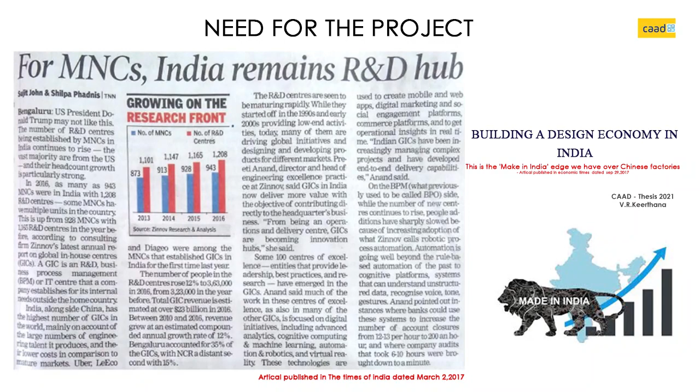Made in India can overtake Made in China in near future for one big reason: China has to pay more to its workers, which raises output cost and makes goods expensive.

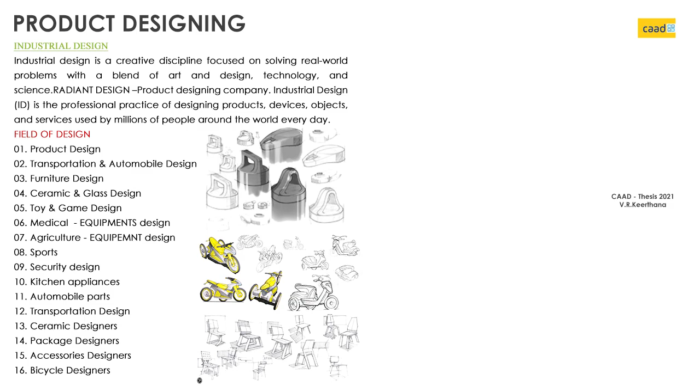Fields of innovation: designing always goes with science and technology. So product designing and science and technology are two main fields to be involved. Product design comes under many categories, from which industrial design, communication design, etc. are taken up. Science and technologies come under research and development.

The site is located in Coimbatore, Tamil Nadu, exactly on Avinashi Road, Peelamedu, Coimbatore, Tamil Nadu. Coimbatore is the third largest city of the state, one of the most industrialized cities in Tamil Nadu.

There are more than 25,000 small, medium, large-scale industries and textile mills situated here. Coimbatore is also famous for foundry and automobile industries, manufacturing of textile industry equipment, spares, motor pump sets, wet grinders, and varied engineering goods and services.

Education: Coimbatore is one of the very important educational cities in South India. Coimbatore is also home to many state-owned universities. It ranks top 10 in India and second in Tamil Nadu, next to Chennai, in science and technology.

Industries: the city is the second largest software producer in Tamil Nadu, next only to Chennai. The software development is set to take an upswing with the launch of TIDEL Park and other private IT parks around the city. Coimbatore is also emerging as an IT and BPO city, ranked 17th among the global outsourcing cities. The city houses a large number of small-scale engineering companies.

Site area: 49,574 square meters, that makes up 12.25 acres. Location: 63 Avinashi Road, Peelamedu, Coimbatore, Tamil Nadu.

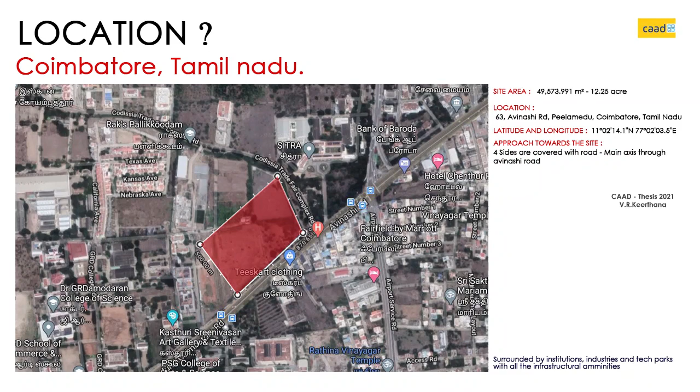Approach towards the site: 4 sides are covered with road, main axis through Avinashi Road, surrounded by institutions, industries, and the tech parks with all the infrastructural amenities.

Site analysis: the approach towards the site is from Avinashi Coimbatore Road and Codissia Trade Fair Road on 2 sides. It is surrounded by commercial zone, institutes, auditorium, etc. One side of the road goes towards Avinashi and the other side goes towards central Coimbatore.

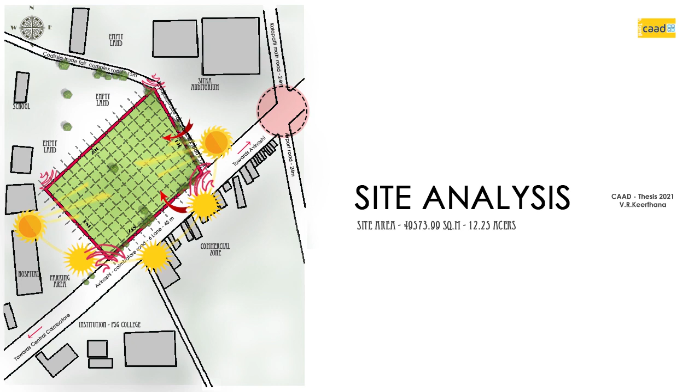The junction which connects Avinashi Coimbatore Road, Airport Road and Kalapatti Road acts as a main junction, with accessibility from 2 main roads. It falls under tropical wet and dry climate. Noise from main roads is high, and the other sides are consecutively low. The wind flows from the northeast.

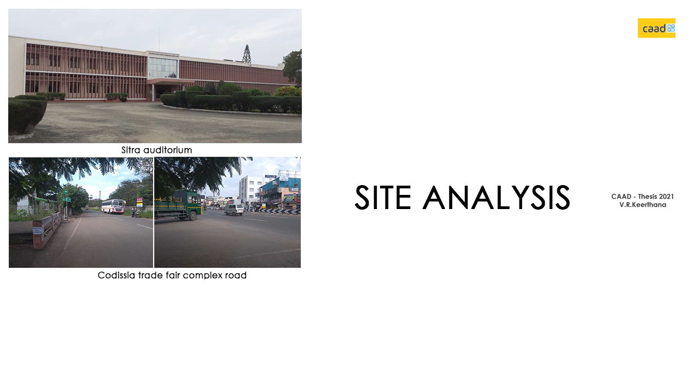Some of the on-site and off-site photos: Sitra Auditorium, Codissia Trade Fair Complex Road, junction which links all 4 main roads, PSG College, Aravind Eye Hospital, and the site filled with shrubs, creepers, plants and grass.

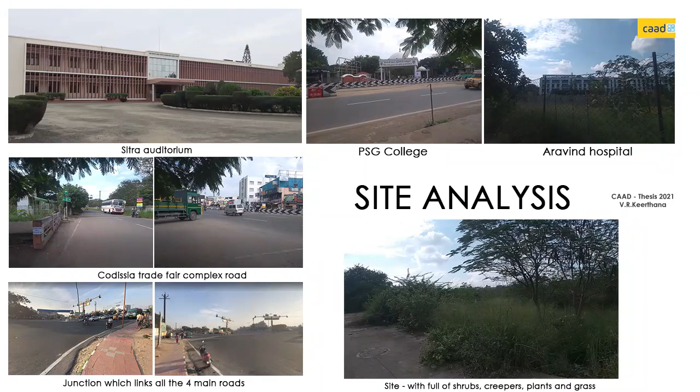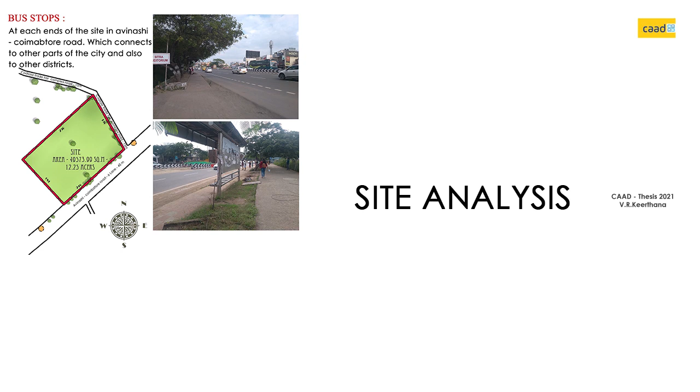Bus stops at each end of the site towards the main road, and railway at 3.27 kilometers with travel distance of 10 minutes to Peelamedu railway station, and airport at 1.8 kilometers with travel distance of 5 minutes to Coimbatore airport. Pedestrians have a fully maintained footpath with buffer spaces provided in the front.

Special study: play of daylighting in architecture. A room is not a room without natural light. Natural lighting plays a major role in workspaces, which improves satisfaction and productivity in users.

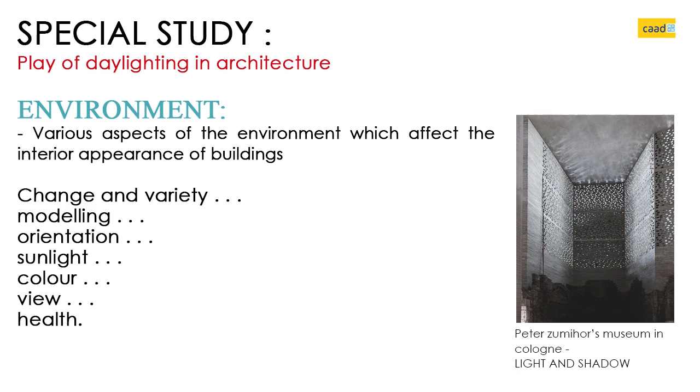Natural light reduces the need of artificial lighting during daytime hours. Energy costs are lowered, which has a positive impact on the environment. Maximize the benefits of natural light in office spaces by including biophilic elements; adding indoor plants and fountains make spaces feel calmer and improve satisfaction, which is influenced by windows, obstacles, etc.

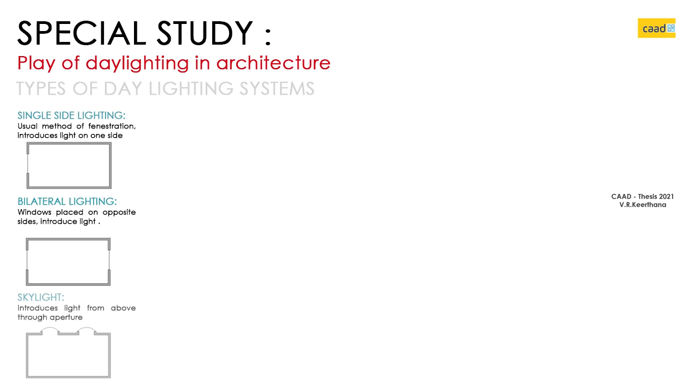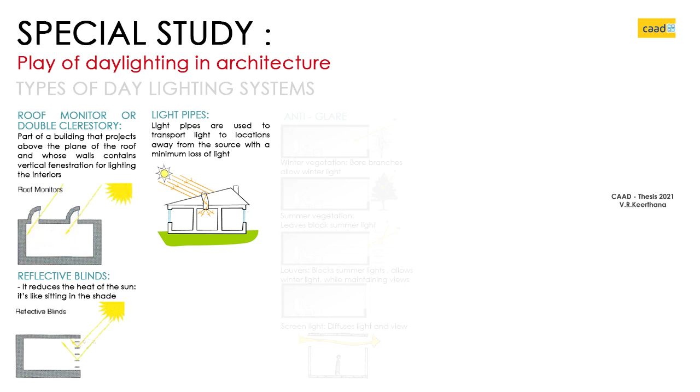Types of daylighting systems: single side lighting, bilateral lighting, sky lighting, light well, light shelf, external reflectors, atrium, light duct, clerestory, roof monitors or double clerestory, reflective blinds, light pipes, anti-glare components, side lighting, top lightings, trellis, and planters. Concept: nature between walls.

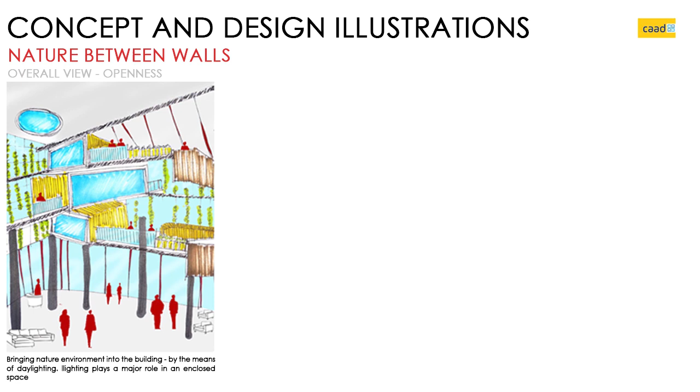Bringing nature environment into the building by means of daylighting. Lighting plays a major role in an enclosed space. Sunlight sensors detect sunlight and the facades act according to the needs.

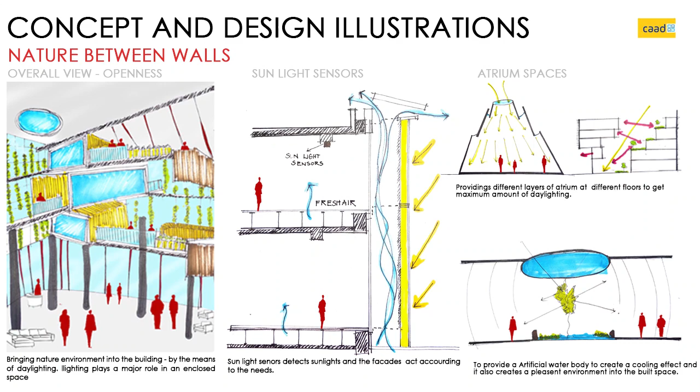Atrium space: to provide an artificial water body to create a cooling effect, and it also creates a pleasant environment in the built space, providing different layers of atrium at different floors to get maximum amount of daylighting.

Based on site analysis: summer blooming trees act as a shading device in summer and shed during winter to give maximum amount of lighting in winter.

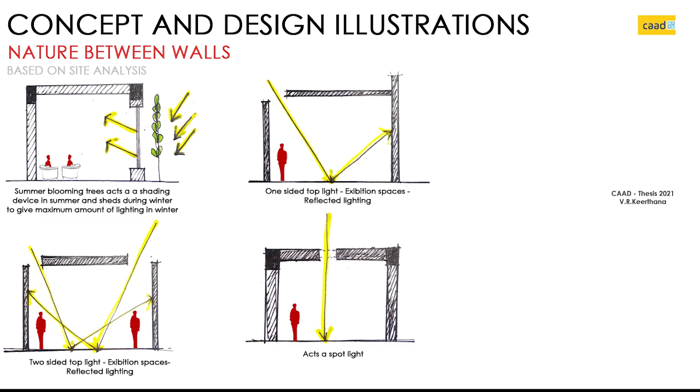Two-sided top light for exhibition spaces, reflected lightings. One-sided top light for exhibition spaces, reflected lighting. Acts as a spotlight in workspaces.

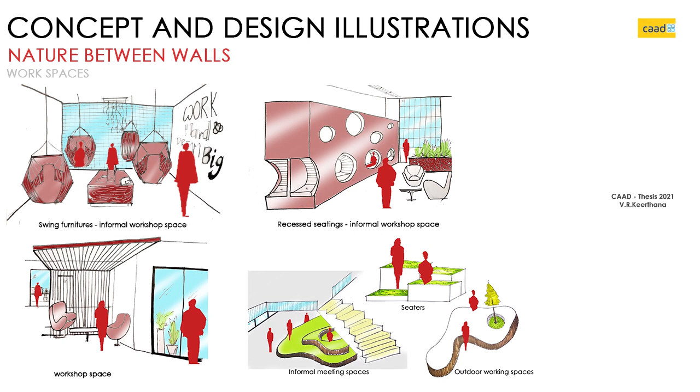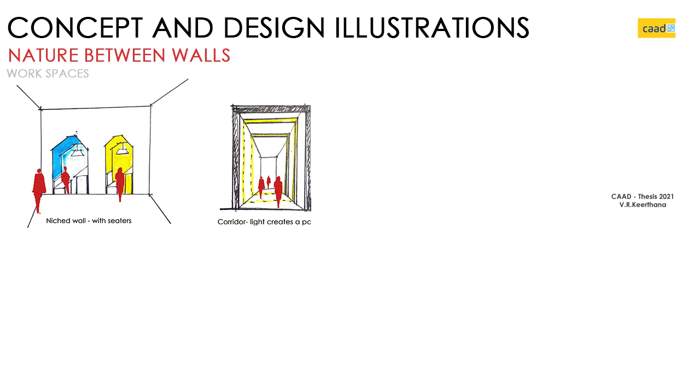And now let's get into the walkthrough.